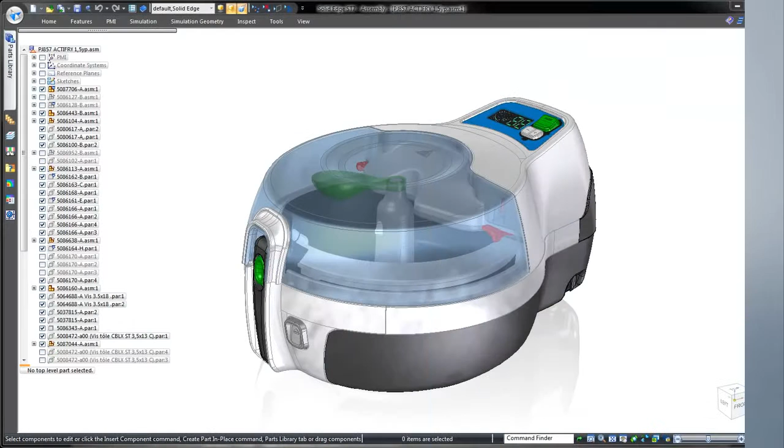Solid Edge delivers intuitive tools for complex shape construction, a must for designers of ergonomic and aesthetically pleasing consumer products. Here we have a kitchen appliance from one of our customers, Tefal.

To demonstrate Solid Edge's capabilities, we'll redesign the rear panel of this domestic fryer to eliminate physical interference between its cooling fan and the rear casing.

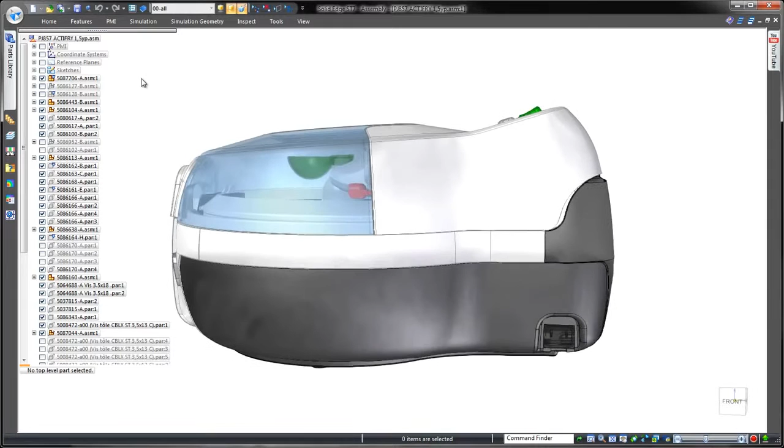An industrial designer has modified the rear panel in conceptual sketches, so we'll display these in Solid Edge. This new design accommodates the repositioned fan while also providing a handhold to easily lift the fryer. We'll use this collection of sketches as a template to guide curve creation, ensuring we closely match the designer's vision.

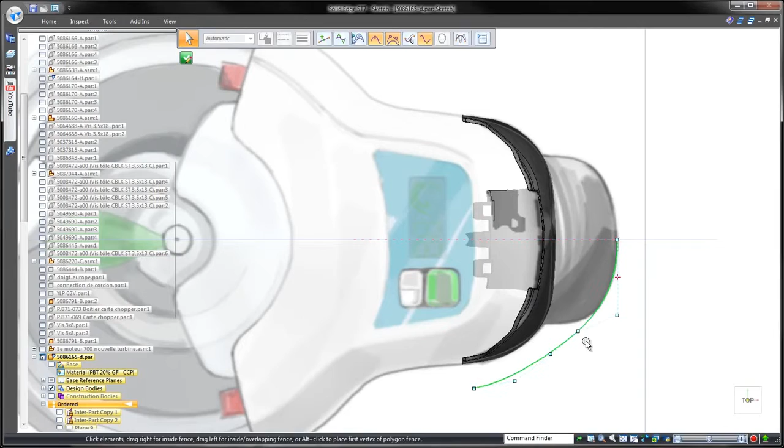Solid Edge allows us to generate a free-flowing yet customizable curve with a minimum of control points, yet drag any point and completely change the shape. In this case, we'll design one half of the new feature and then mirror to complete the design, connecting the endpoint of the curve to the part's midline.

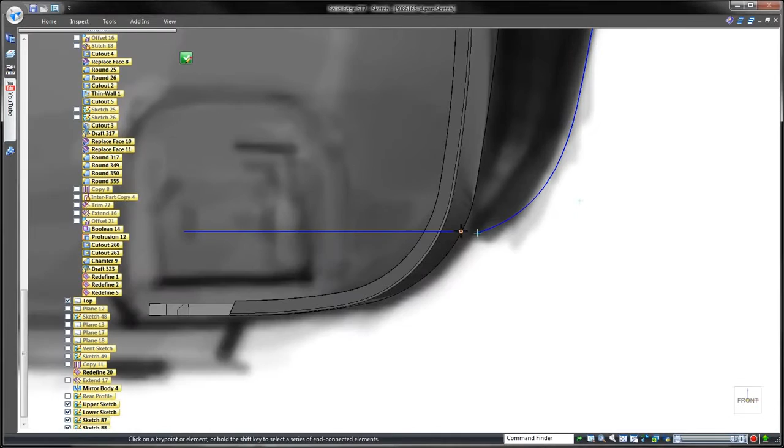Here we'll use two pre-existing sketches placed relative to the top and bottom in the industrial design sketch. Once again, we'll draw a curve to match the side profile of our template and connect the endpoints to these upper and lower sketches to define the exact start and end points for the final feature. We drag control points to replicate the conceptual shape.

The cross and guide curves must be connected to create a successful surface feature, and Solid Edge BlueDot does the job.

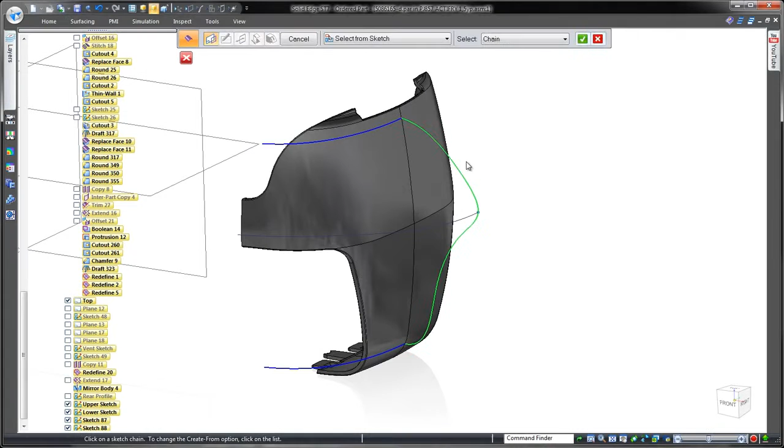We'll extrude this curve to create a construction surface for controlling tangency across the midline of a symmetric part. BlueSurf within Solid Edge enables us to loft a surface between the three curves while guiding its shape with the edge of the construction surface. Individual tangency controls ensure that the BlueSurf is tangent continuous with the construction surface and thus the mirrored face.

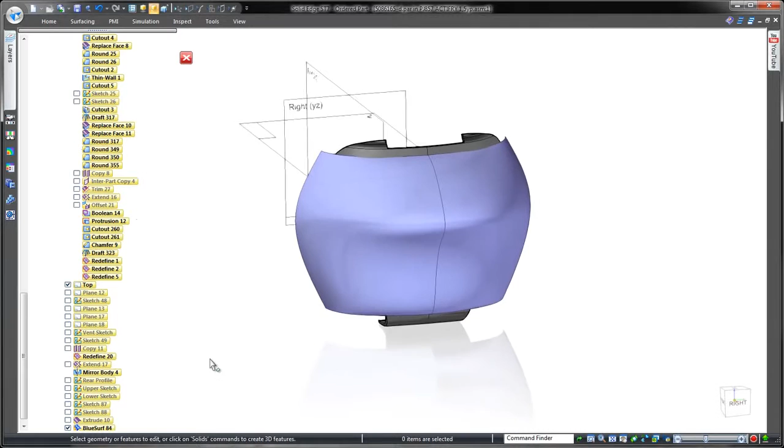Our next task is to trim away part of the surface we don't need. We'll project onto our surface an existing curve based on the conceptual sketch. Simple and fast.

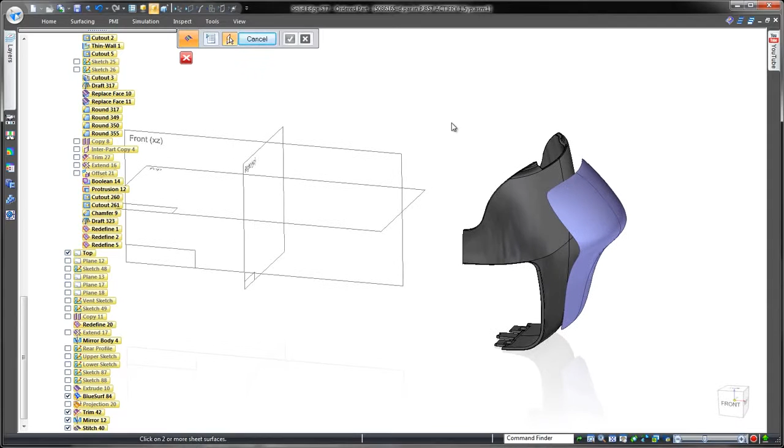To complete this rear surface, we'll stitch together the two halves. The ruled surface command extends the edges through the existing casing part.

Advanced rounding really aids aesthetics, so we'll place a constant width round along the edges. Next, we'll use surface body by boundary to cap off the inside of the surface body.

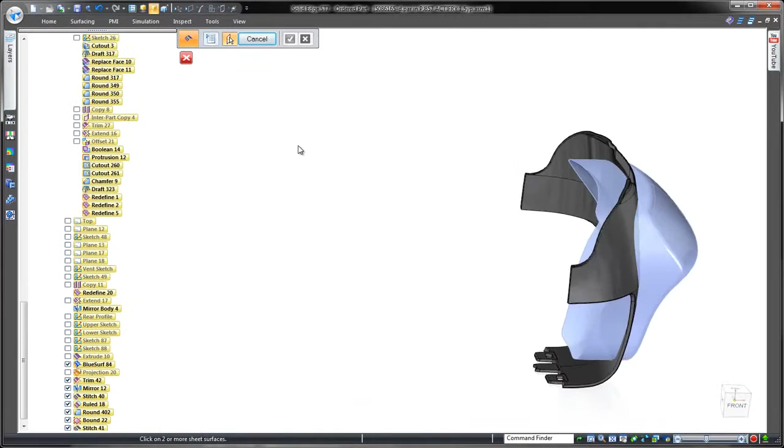Stitching these two faces will form a solid body that we can use to punch or emboss the original part. Simple and fast. We can finish the design by rounding the resulting edges.

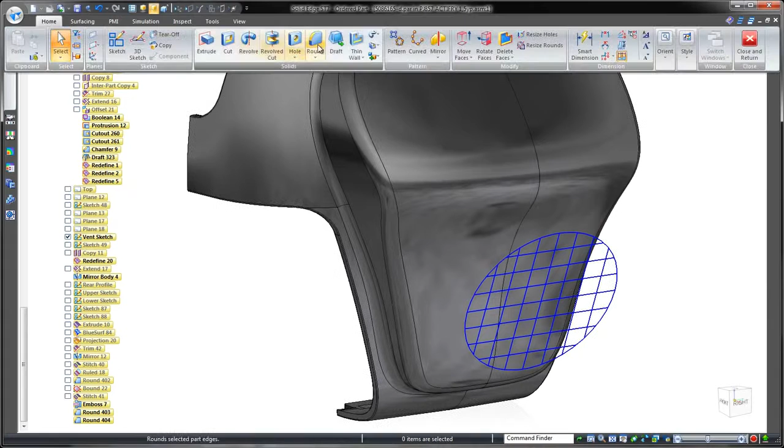Since our design goal is to make space for an exhaust fan, we need to build in a vent. The vent tool constructs a customizable series of ribs and spars in an array using any basic sketch. Imagine creating this complicated feature with traditional cutouts and extrusions.

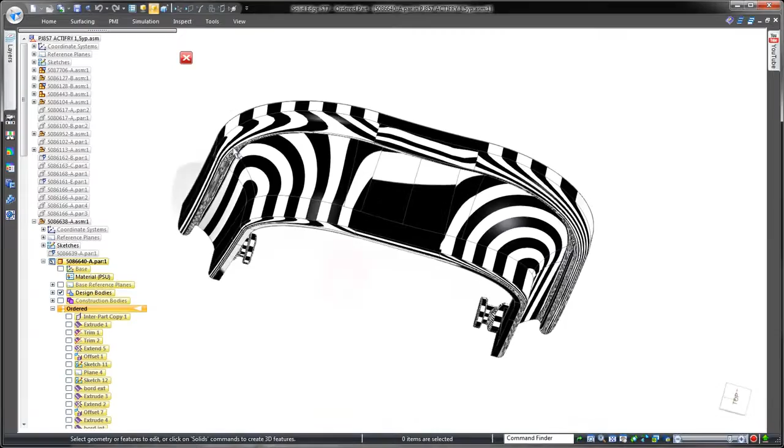Creating complex shapes in Solid Edge is easy, yet smoothness and flow of the final plastic is of utmost importance. In this part, we have 6 individual faces along the top. The Zebra Stripe visual inspection tool helps.

Note that the zebra stripes reflect jagged transitions across the patches, so we'll use the Redefine tool to merge the 6 patches into one beautiful and continuous surface.

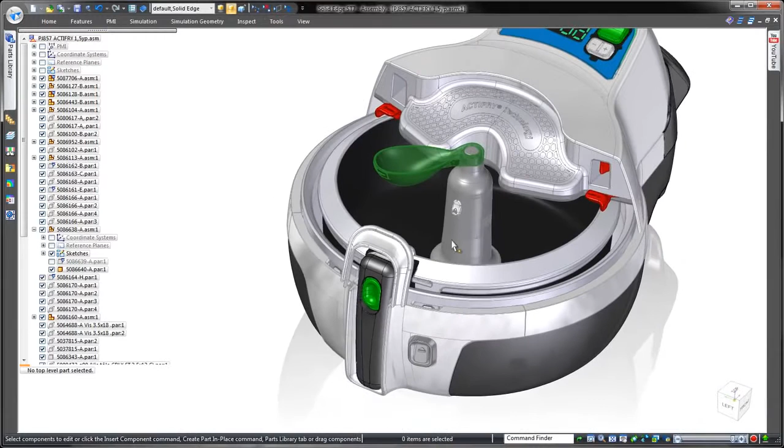Now that we've seen some powerful surfacing tools in Solid Edge, watch as we create complex geometry utilizing multiple solid bodies. This fryer uses a stirring paddle to ensure an even distribution of cooking oil throughout the food, so we need to design an arm coming off the paddle's mounting hub.

To begin, we have a top view sketch of the arm's shape and a side profile sketch depicting how the top of the arm curves away from the center mount.

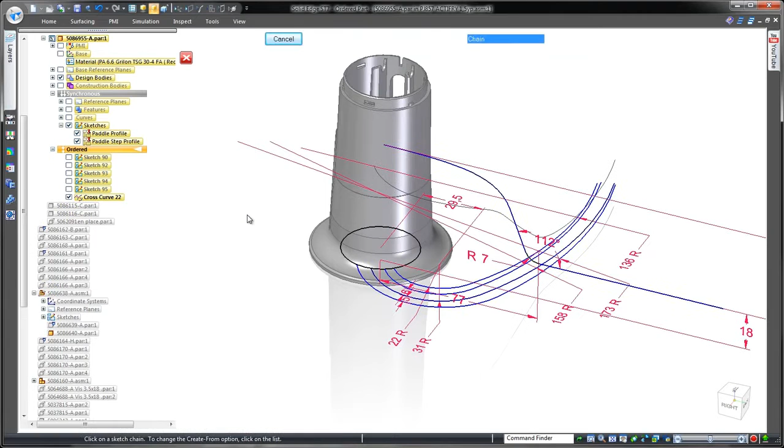We'll combine these sketches to generate a resulting cross curve of their virtual intersections. As we create a series of profiles through which we can create a lofted feature, we'll use the pre-existing curves to guide the feature's transition through the cross sections.

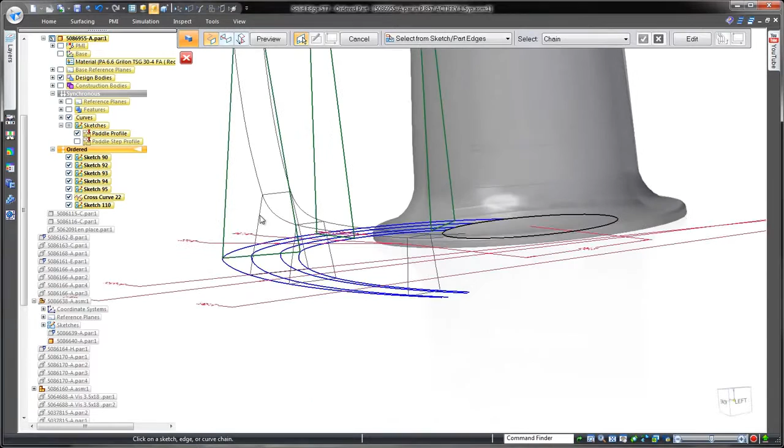At any point, we can make a change to the defining cross-section profiles. Watch how the complex lofted feature dynamically updates. In this case, we want to retain the original design.

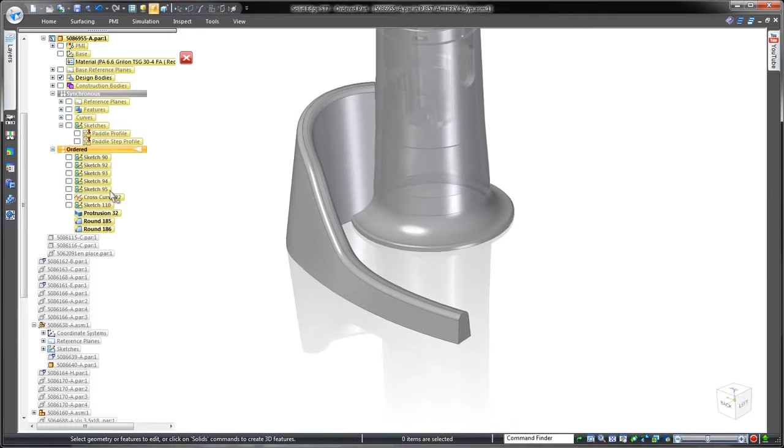To finish this arm, we'll place a constant width round on the top edges. The end of the paddle is a proven design that we're simply going to integrate into our paddle arm. Watch as we use the Replace Face command to trim away the end of the arm body.

Our final goal is to hollow out the paddle's face. A Replace Face option allows us to add a cross-section sketch which we can pull inward.

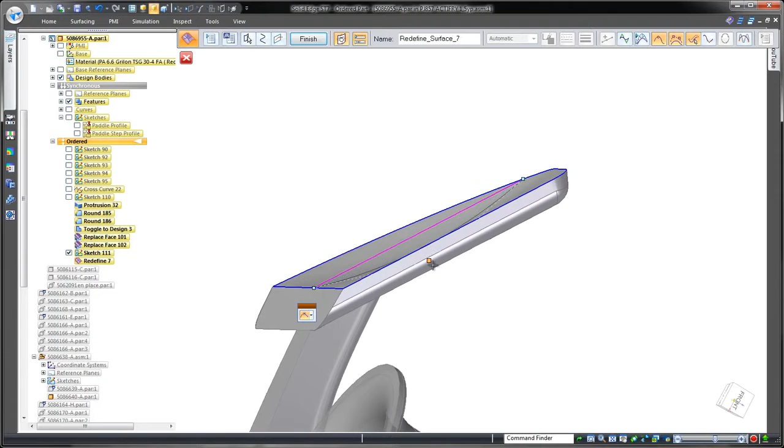That was easy. In this demonstration, we've proven that Solid Edge provides a broad collection of surface and solid modeling tools, perfect for creation of complex consumer products.